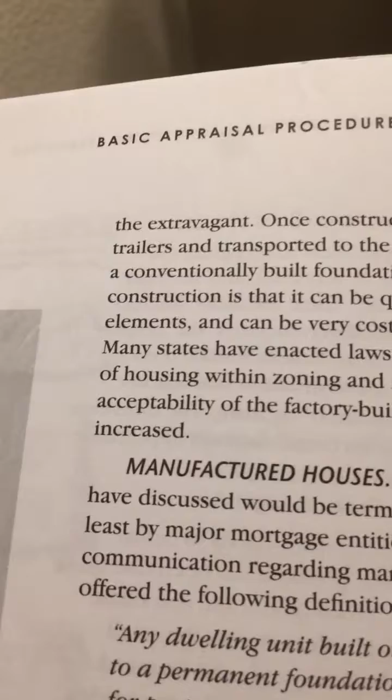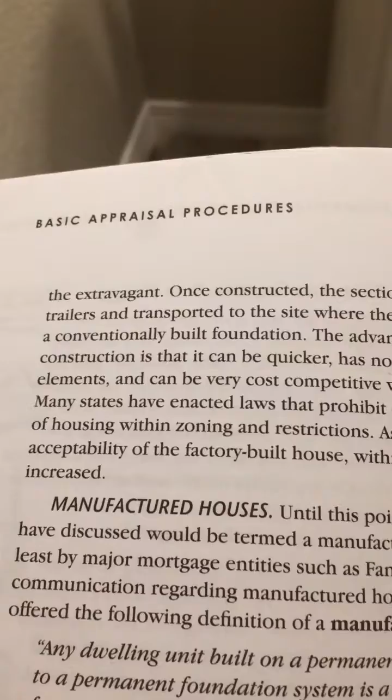Once constructed, the sections are loaded onto trailers and transported to the site where they are rolled off onto a conventionally built foundation. The advantage to this type of construction is that it can be quicker, has not been exposed to the elements, and can be very cost competitive with site-built houses.

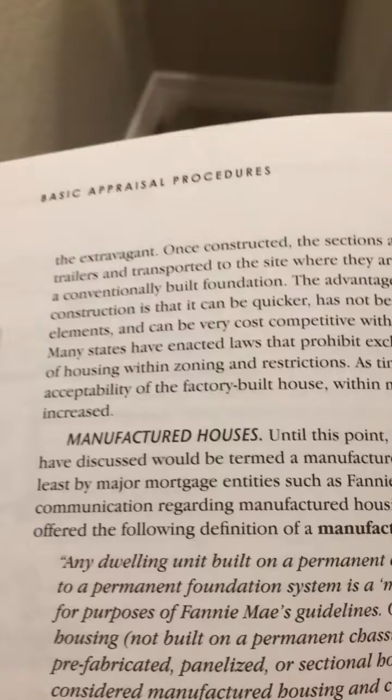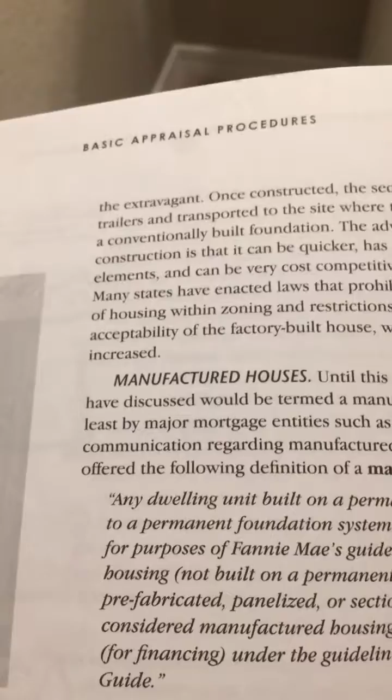Many states have enacted laws that prohibit exclusion of this type of housing within zoning and restrictions. As time has passed, the acceptability of the factory-built house within most markets has increased.

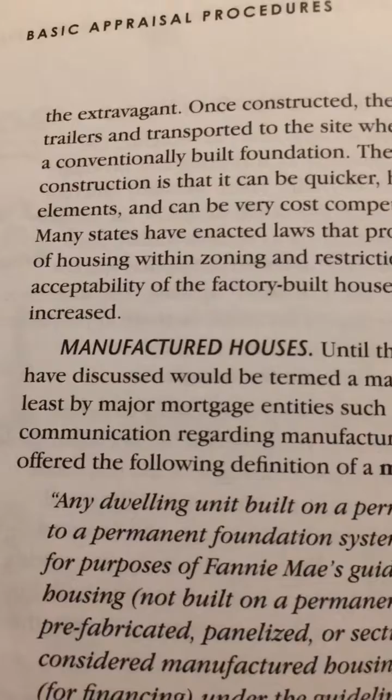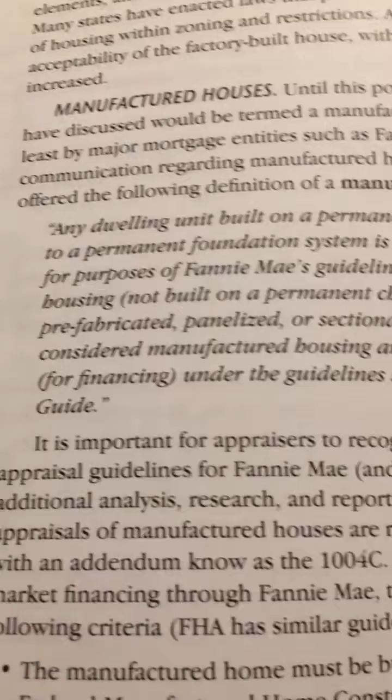Manufactured houses. Until this point, nothing we have discussed would be termed a manufactured house, at least by major mortgage entities such as Fannie Mae. In 2003 communication regarding manufactured housing, Fannie Mae offered the following definition: any dwelling unit built on a permanent chassis and attached to a permanent foundation system is a manufactured home. For purposes of Fannie Mae's guidelines, other factory-built housing not built on a permanent chassis, such as modular, prefabricated, panelized, or sectional housing, is not considered manufactured housing and continues to be eligible for financing under the guidelines stated in the selling guide.

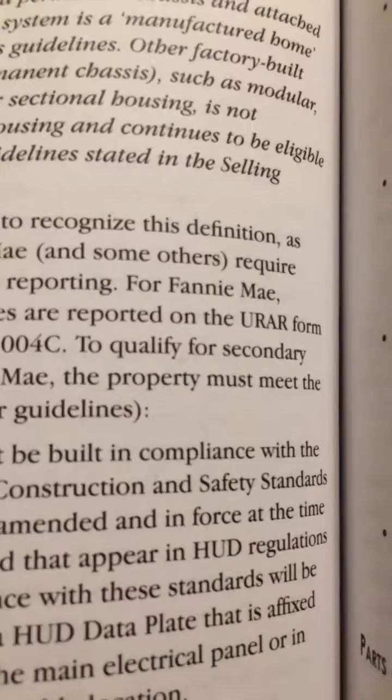It is important for appraisers to recognize this definition, as appraisal guidelines for Fannie Mae and others require additional analysis, research, and reporting. For Fannie Mae, appraisals of manufactured houses are reported on the URAR form with an addendum known as the 1004C. To qualify for secondary market financing through Fannie Mae, the property must meet the following criteria.

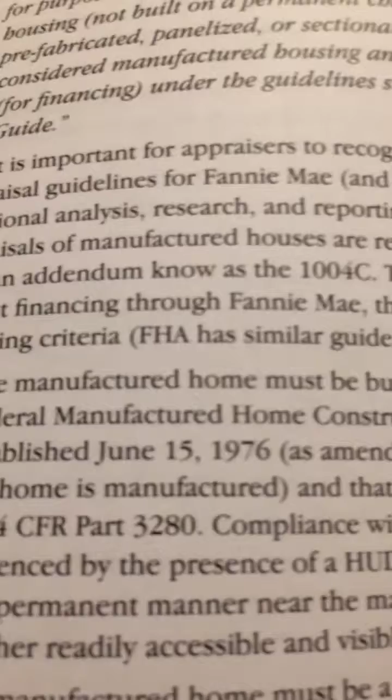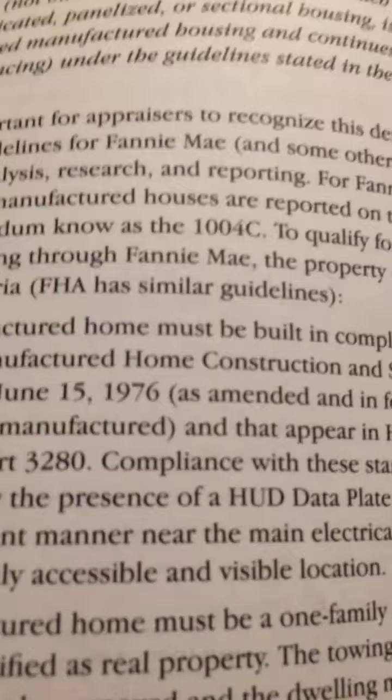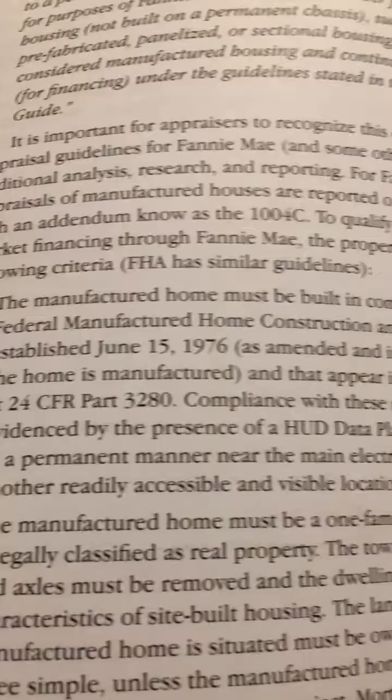FHA has similar guidelines. The manufactured home must be built in compliance with federal manufactured home construction and safety standards established June 15, 1976, as amended and enforced at the time the home is manufactured, and that appear in HUD regulations at 24 CFR Part 3280. Compliance with these standards will be evidenced by the presence of a HUD data plate affixed in a permanent manner near the main electrical panel or in another readily accessible and visible location.

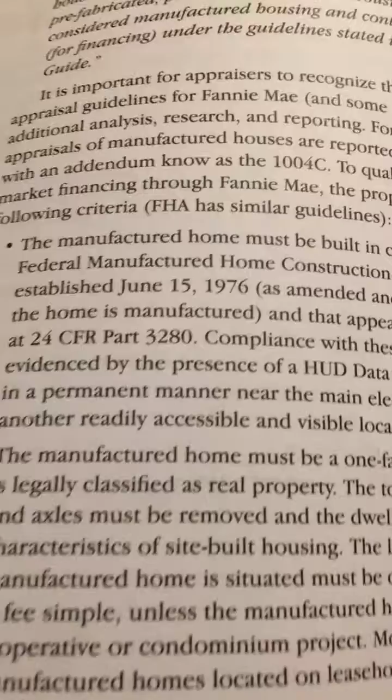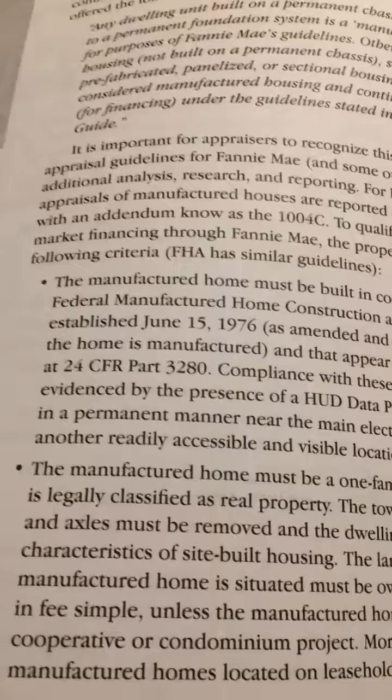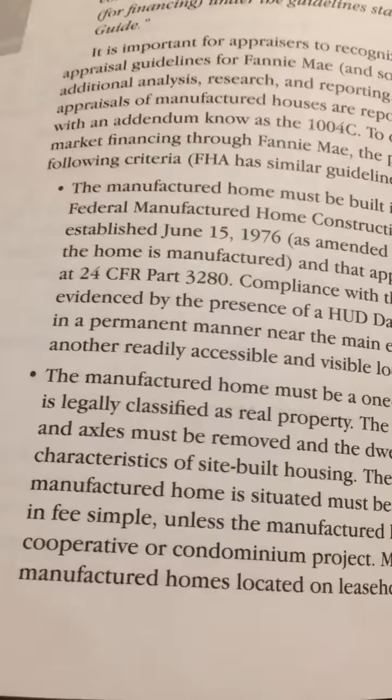The manufactured home must be a one-family dwelling that is legally classified as real property. The towing hitch, wheels, and axles must be removed, and the dwelling must assume the characteristics of site-built housing. The land on which the manufactured home is situated must be owned by the borrower in fee simple, unless the manufactured home is located in a cooperative or condominium project. Mortgages secured by manufactured homes located on leasehold estates are not eligible.

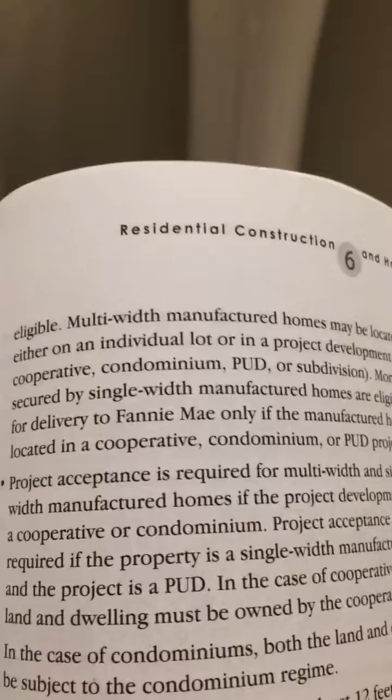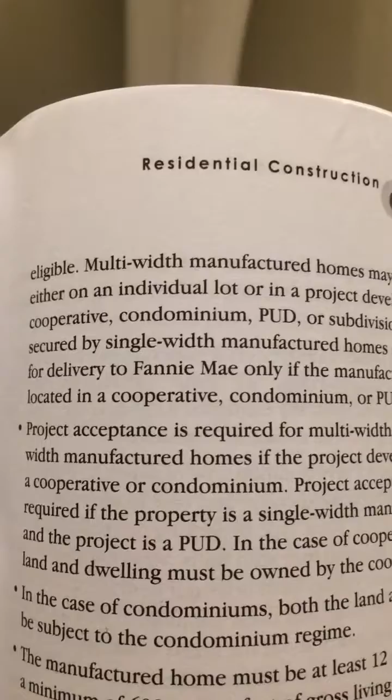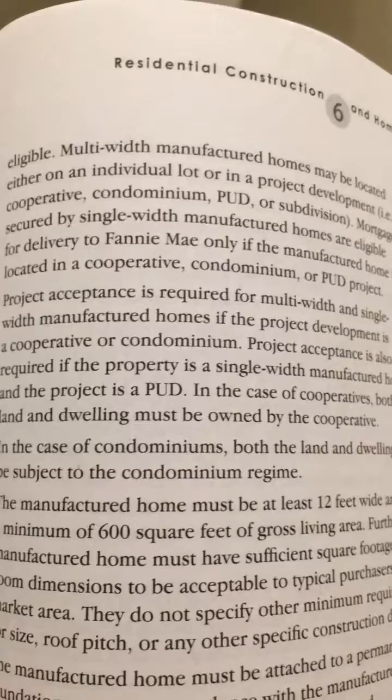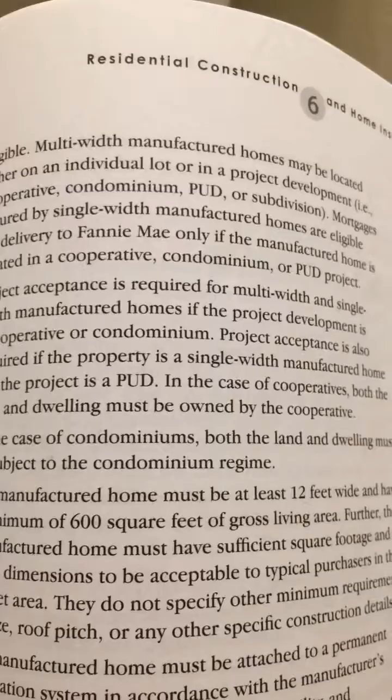Multi-width manufactured homes may be located either on an individual lot or in a project development, for instance cooperative, condominium, PUD, or subdivision. Mortgages secured by single-width manufactured homes are eligible for delivery to Fannie Mae only if located in a cooperative, condominium, or PUD project. Project acceptance is required for multi-width and single-width manufactured homes if the project development is a cooperative or condominium. Project acceptance is also required if the property is a single-width manufactured home and the project is a PUD.

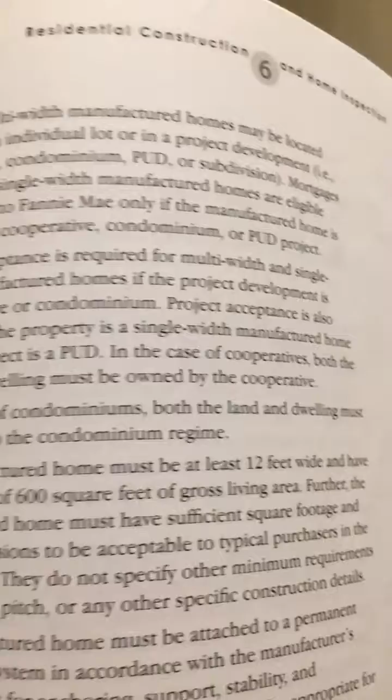In the case of cooperatives, both land and dwelling must be owned by the cooperative. In the case of condominiums, both the land and dwelling must be subject to the condominium regime.

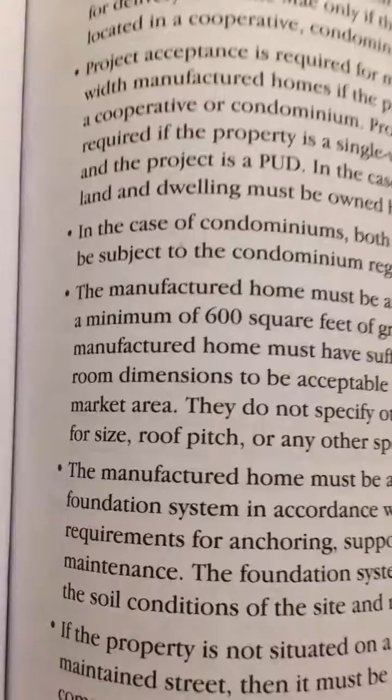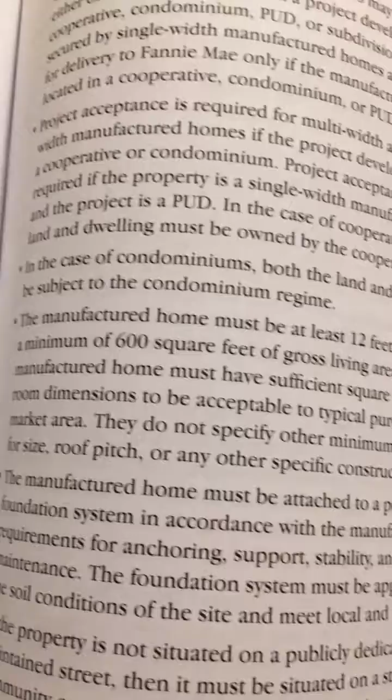The manufactured home must be at least 12 feet wide and have a minimum of 600 square feet of gross living area. Further, it must have sufficient square footage and room dimensions to be acceptable to typical purchasers in the market area. They do not specify other minimum requirements for size, roof pitch, or any other specific construction details.

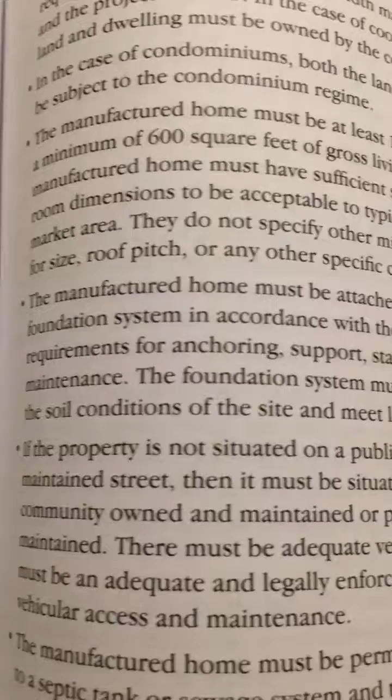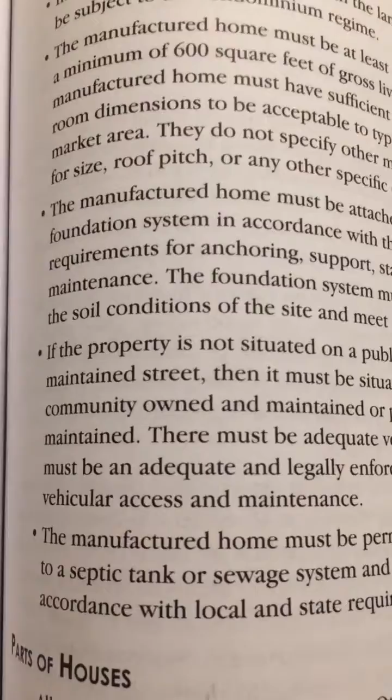The manufactured home must be attached to a permanent foundation system in accordance with the manufacturer's requirements for anchoring, support, stability, and maintenance. The foundation system must be appropriate for the soil conditions of the site and meet local and state codes. If the property is not situated on a publicly dedicated and maintained street, then it must be situated on a street that is community owned and maintained or privately owned and maintained.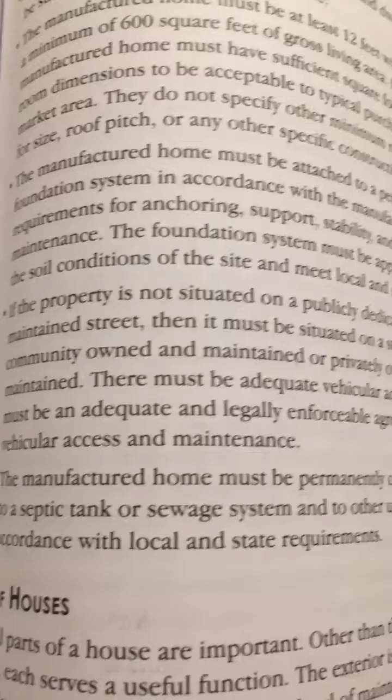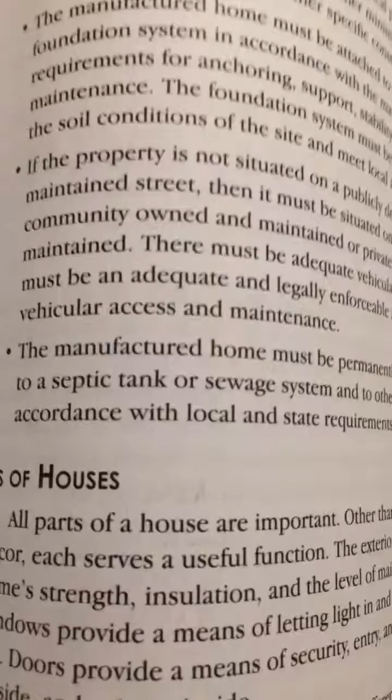There must be adequate vehicular access, and there must be an adequate and legally enforceable agreement for vehicular access and maintenance. The manufactured home must be permanently connected to a septic tank or sewage system and to the other utilities in accordance with local and state requirements.

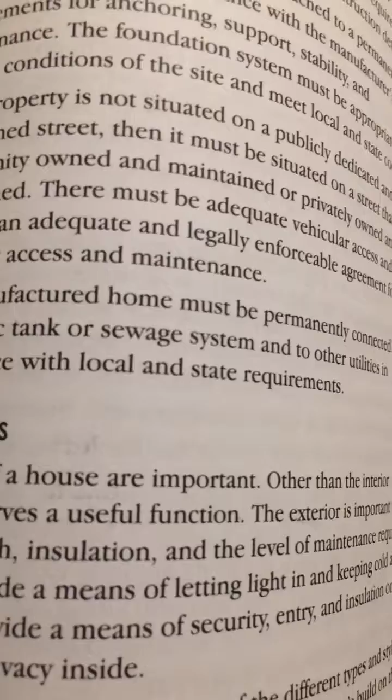Important points: appraisers need to know the difference between factory-built, manufactured, and site-built homes. Fannie Mae does not accept mortgage loans for manufactured homes unless they meet certain criteria, similar to FHA guidelines.

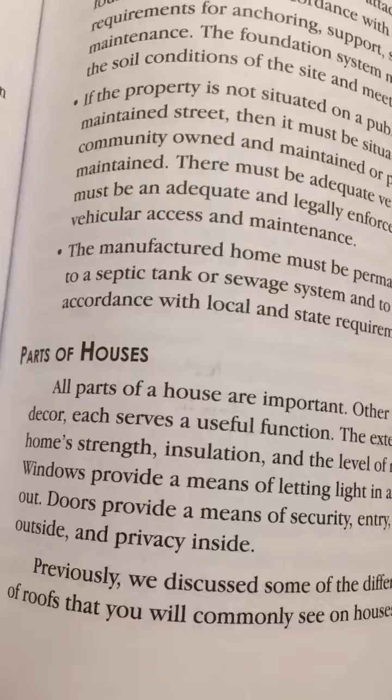Parts of houses. All parts of a house are important, other than the interior decor. Each serves a useful function. The exterior is important to a home's strength, insulation, and the level of maintenance required. Windows provide a means of letting light in and keeping cold air out. Doors provide a means of security, entry, and insulation on the outside and privacy inside.

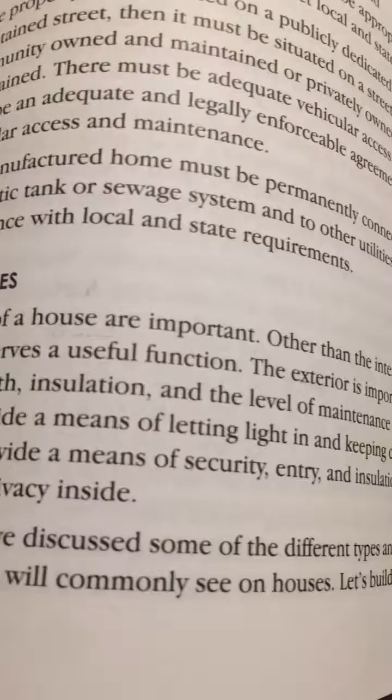Previously, we discussed some of the different types and styles of roofs that you will commonly see on houses. Let's build on that.